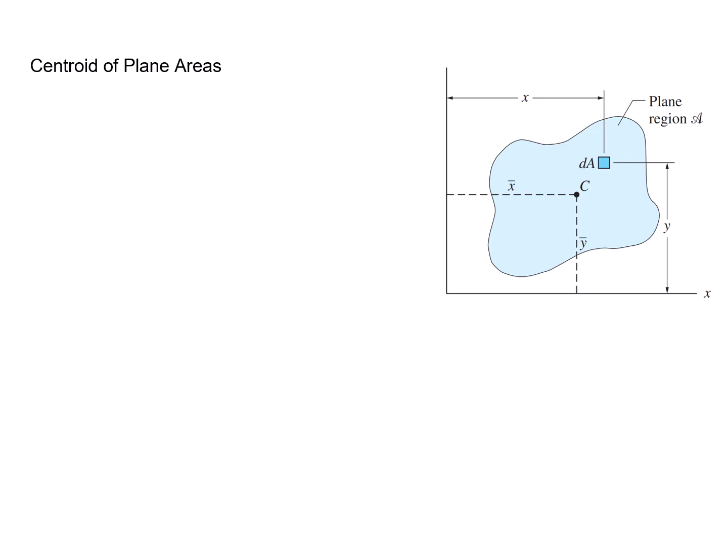So centroid of plane areas, we can see in the figure there's a plane area, let's call it cursive A. Then it has dA located at X and Y, and it has a centroid located at X bar, Y bar. So the cursive A is the plane region, and dA is the differential area element of cursive A. Let's just call it cursive A.

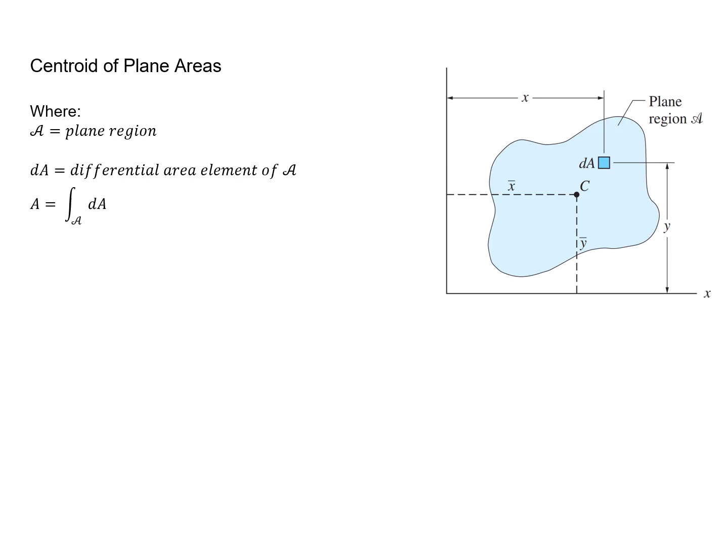And to get the area, we must integrate dA. So the first moment of area, or Q, this serves as a measure of how an area is distributed relative to an axis. It tells you where the area is located relative to the axis. So one purpose of this Q, or the first moment of area, is to locate the centroid.

So QX - centroid is the geometric center of the region. The centroid and center of mass coincide only when the distribution of mass is uniform or if the body is homogeneous. So Q sub X, or the first moment of area relative to the x-axis, is equal to the integral of y dA, while Qy is equal to the integral of x dA.

We must note that the unit for Q is cubic length - cubic meter, cubic inch, or cubic feet. Then to get the x and y coordinate of the centroid, we must divide Qy over A for the x coordinate and Qx over A for the y coordinate. So knowing this relationship, we can form this formula.

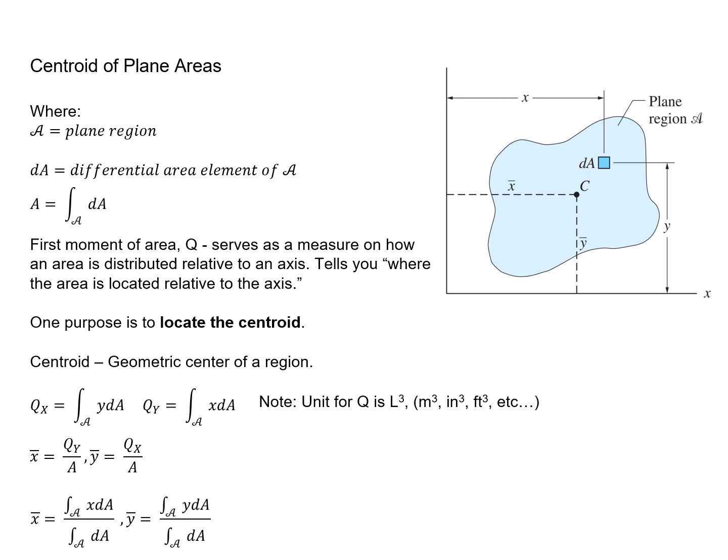X bar is equal to the integral of x dA all over the integral of dA. Y bar is equal to the integral of y dA all over the integral of dA.

So for the curves, the cursive L is the plane curve and ds is the differential length of plane curve L. To get the total length of the curve, we must integrate ds. So same relationship as before, just replace area with s, or length of curve.

Qx is equal to the integral of y ds, while Qy is equal to the integral of x ds. So the x component of the centroid is equal to Qy over L, while the y component of the centroid is equal to Qx over L.

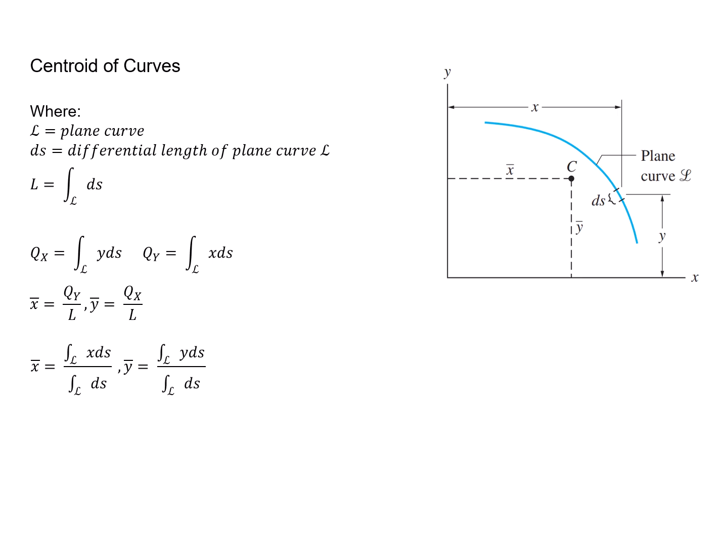So we can form this formula: X bar is equal to the integral of x ds all over the integral of ds. Y bar is the integral of y ds all over the integral of ds. Same as before, Q is cubic length - meter cube, inches cube, or feet cube.

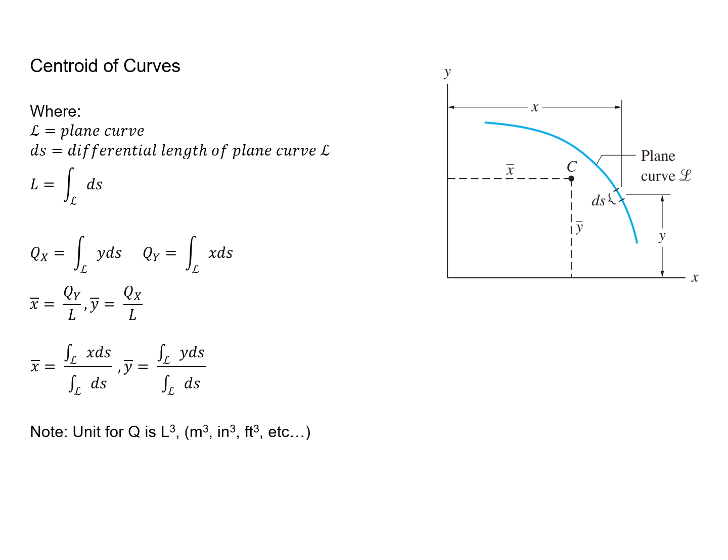So there are different integration techniques, just memorize them. For figures A and B, it involves double integration, while figures C to E involve the usual integration method that you've already learned in integral calculus. I'm assuming you've already taken statics, so you already know how to integrate, right? I'll show you a sample problem using double integration later on.

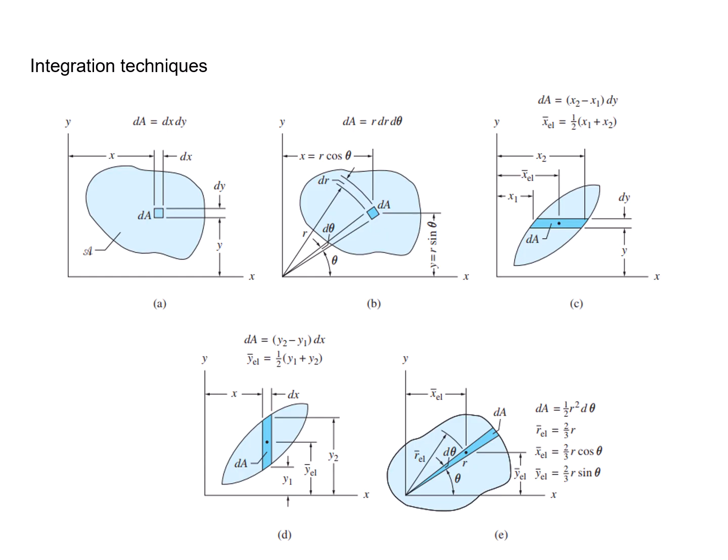basically it's still Qy all over A for the x bar and Qx all over A for the y bar. The difference is you can use the summation of area times their respective x coordinates divided by the summation of area for the x bar. And for the y bar, the summation of area times their respective y bars divided by the summation of areas.

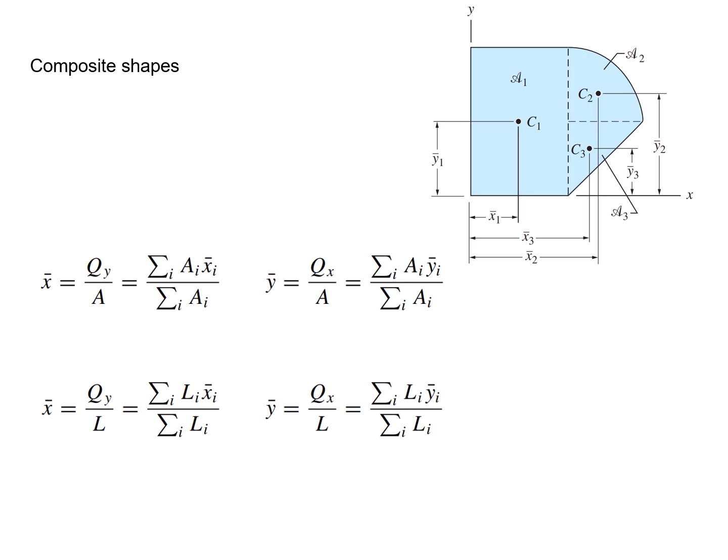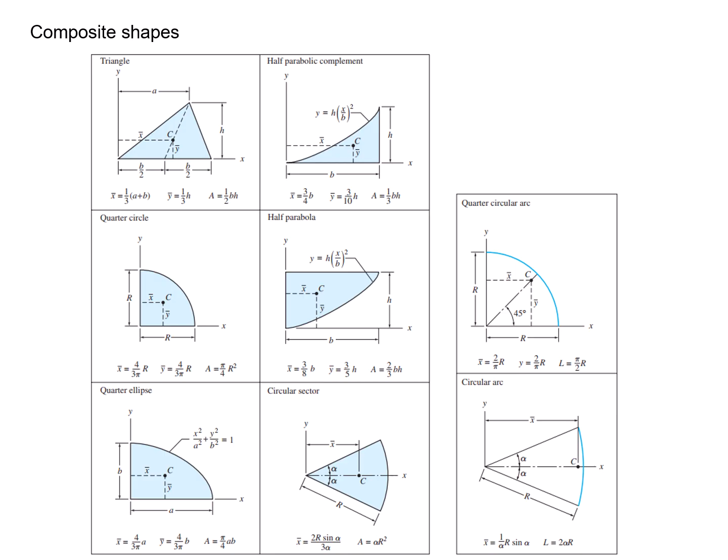So, problem 1. Determine the coordinates of the centroid of the area that lies between the straight line and the parabola. The straight line formula is x equals 2/3 y, while the parabola is x squared equals 40y. First, let's use the double integration method.

Let's get the area. I transformed their equations to be with respect to x. First, let's get the area. dA is equal to dx dy or dy dx. A is equal to the integral of dA. So let's start with dy dx.

dy is equal to y sub 2 minus y sub 1, y upper minus y lower. Y upper is 3x over 2. Y lower is x squared over 40. So that's the first integral: integral of dy, 3x over 2 minus x squared over 40. Then we integrate again via dx, from 0 to 60.

You already know how to get that, right? 3x over 2 minus x squared over 40 using integral calculus manual computations. Then we input that into our calculator. We get the area is equal to 900 mm squared.

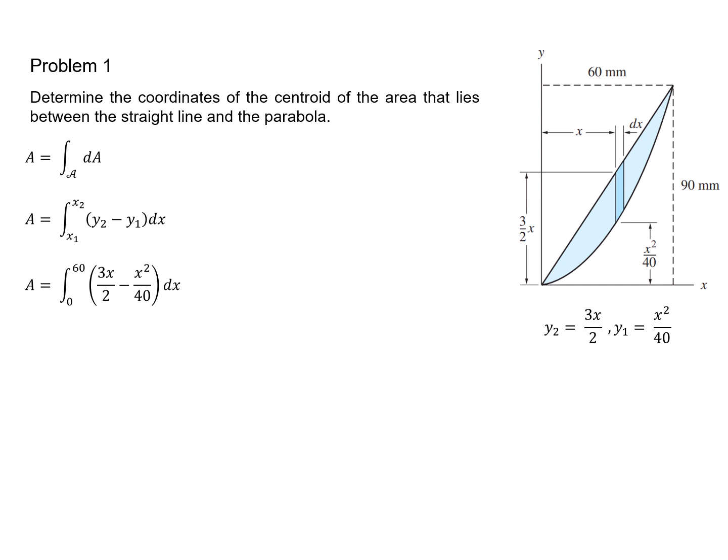Same problem, but this time using a vertical differential area element. Area is x sub 2, x sub 1 that we will use, times y sub 2 minus y sub 1. Y sub 2 is equal to 3x over 2, while y sub 1 is equal to x squared over 40. So area is equal to 900 millimeters squared.

While Qy is equal to the integral of x dA, sorry. So replace x dA with 3x over 2 minus x squared over 40. The upper and lower limits are 60 and 0 respectively. We can obtain Qy is equal to 27,000 cubic millimeters.

For dQx, earlier we used XEL, right? Now, YEL, which is the center, the point in between the upper and lower values of y, in between y2 and y1 at any given point. So YEL is equal to 1/2 of 3x over 2 plus x squared over 40.

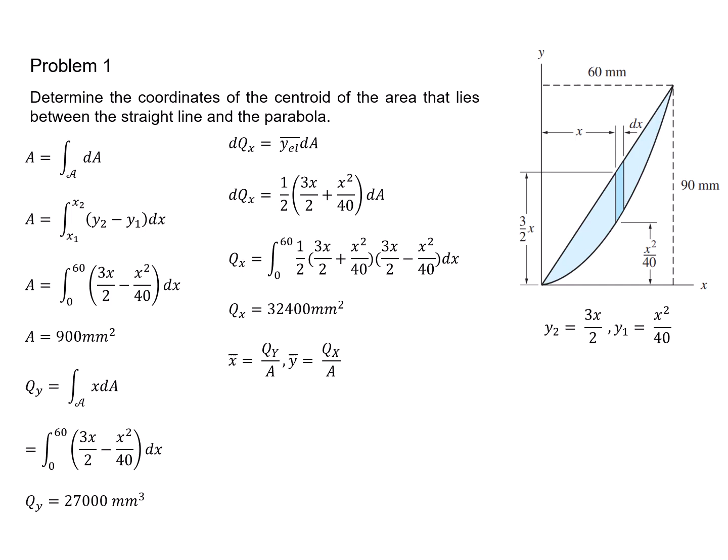We can use integral calculus and input it into the calculator, same as what we did earlier. So Qx is equal to 32,400 square millimeters. Then x bar is equal to Qy over A, y bar is equal to Qx over A. We obtain the same values as before: x bar is 30 mm and y bar is 36 millimeters.

Problem 2: find the coordinates of the centroid. This one won't involve integral calculus. This will only involve the summation of area times the coordinate, all over the summation of area.

Let's get the area of the rectangle as a whole. We have area is equal to base times height, which is 400 plus 200 plus 200, or 800 for the base, and 700 for the height. We have an area of 560,000 square millimeters.

Ang x bar ng rectangle is 0 kasi it lies on the center. Ang y bar or y coordinate ng centroid is equal to 1/2 its height, so 350 millimeters.

For the semicircle naman, napansin nyo may minus kasi deductive siya, diba? Area niya is 1/2 pi r squared. So 1/2 pi 300 squared. Area is equal to negative 45,000 pi.

So yung centroid niya, kanina nasa slide kung paano makuha yung mga centroid and areas of different common shapes. Centroid ng circle, CX, centroid ng semicircle is 4r over 3 pi. So 4 times 300 all over 3 pi. Centroid niya is 127.324 from its center.

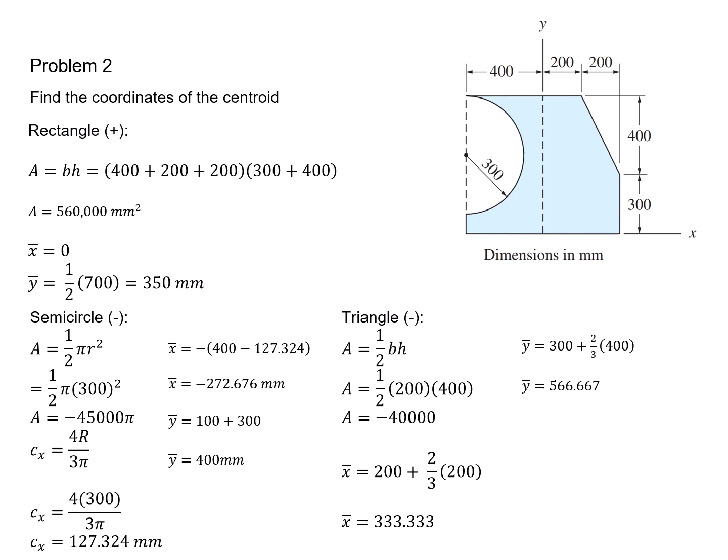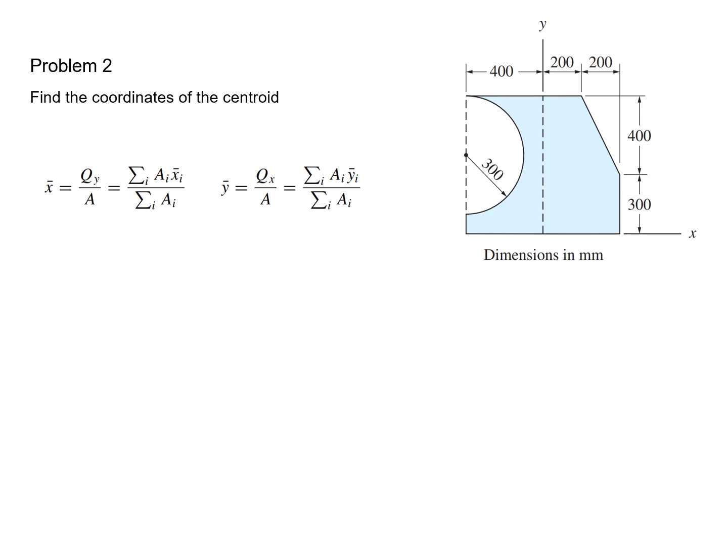So i-tabulate natin. Gamitin natin ang concept na x bar is equal to the summation of Ax bar all over the total area, and y bar is the summation of the respective area and their respective y bar divided by the total area. Gawa tayo ng Excel, ng table.

Nag-summation na tayo ng area. We have a total area of 378,628.331, and the sum of the Ax values is equal to 25,215,327.995, while the summation of the Ay bar, or first moment of area, is 116,784,665.569. So X bar is...

25,215,327.995 divided by the total area. X bar is equal to 66.597 millimeters, while Y bar is equal to 116,784,665.569 divided by the total area. We have Y bar is equal to 308.441 millimeters. So yan.

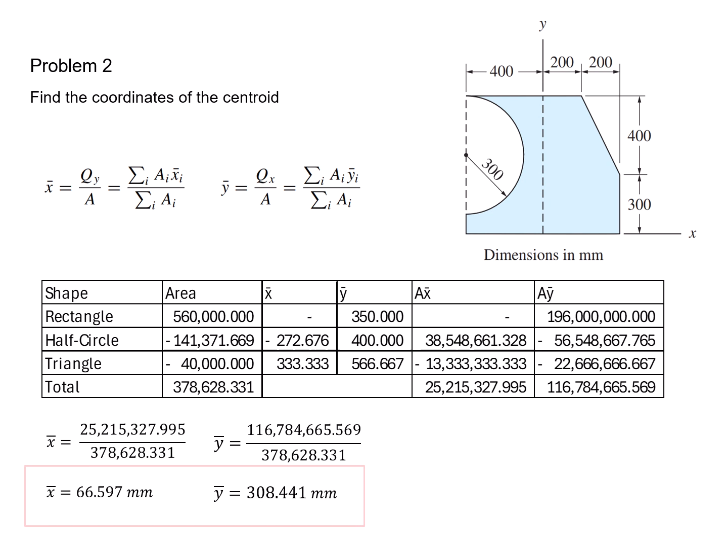So problem number 3, find the coordinates of the centroid. Similar to the previous problem, pero ito, ano siya? Curve instead of area, length.

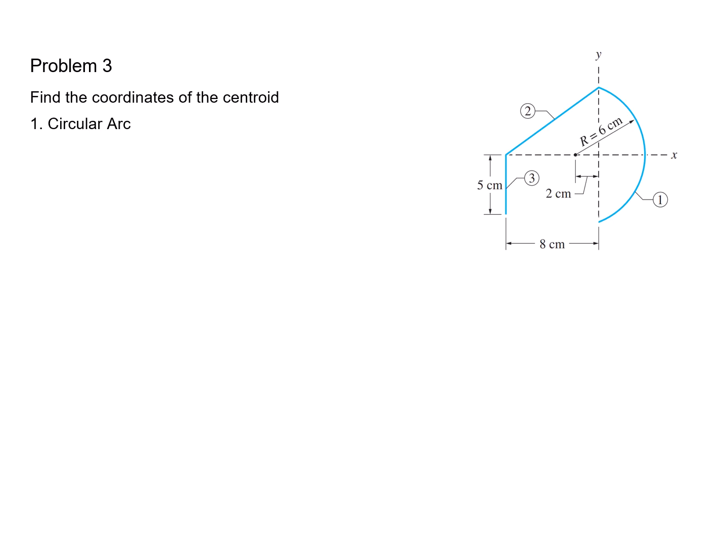So for the circular arc, recall in your geometry, the arc length is equal to the radius times the angle in radian. So para makuha natin yung angle, kunin muna natin si alpha. Alpha is the inverse cosine of 2 over 6. Kasi cosine is equal to adjacent over hypotenuse. So alpha is cosine negative 1 of 2 over 6 is equal to 1.231 radians.

So recall nga natin, the arc length is equal to the radius times the angle in radian form. Angle theta is equal to 2 alpha. Theta is equal to 2 times 1.231. Theta is equal to 2.462. So the arc length is 6 times 2.462 radians. The arc length is 14.772 centimeters.

Tapos recall natin sa previous slides yung figure para makuha yung centroid, yung formulas ng centroid and areas of different shapes and curves. Ito, according dito, ang x component ng centroid niya is equal to 1 over half of the internal angle times radius times sine of the internal angle, sine ng half of the internal angle, or alpha.

So y bar is 0, obvious. X bar is equal to 1 all over 1.231 times the radius 6 times sine of 1.231 radian. X bar is equal to 4.595 centimeters.

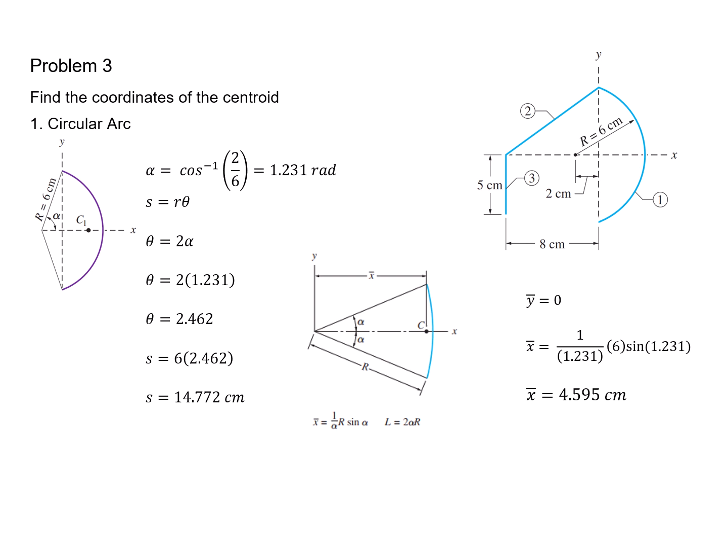Hindi ko nasulat. Laser pointer. Unahin natin yung diagonal line. Kunin natin ang height niya. Height is equal to 6 sine 1.231. Height is equal to 5.657 centimeters. Yung 1.231 na-obtain natin sa part na kinuha natin ang arc length. So height is equal to 8 centimeters.

Base, it should be base. Base is equal to 8 centimeters. So Pythagorean theorem, the length of the diagonal line is equal to the square root of 5.657 squared plus 8 squared. L is equal to 9.798 centimeters.

Yung x bar niya is half ng length niya, so negative 8 divided by 2, so negative 4. While yung y bar naman niya is half ng height, 5.657 divided by 2, y bar is equal to 2.829. For the vertical line, obvious, given na length is 5 centimeters, while the x bar is negative 8 from 0, from the center line, while y bar is half of its vertical length, negative 2.5 centimeters.

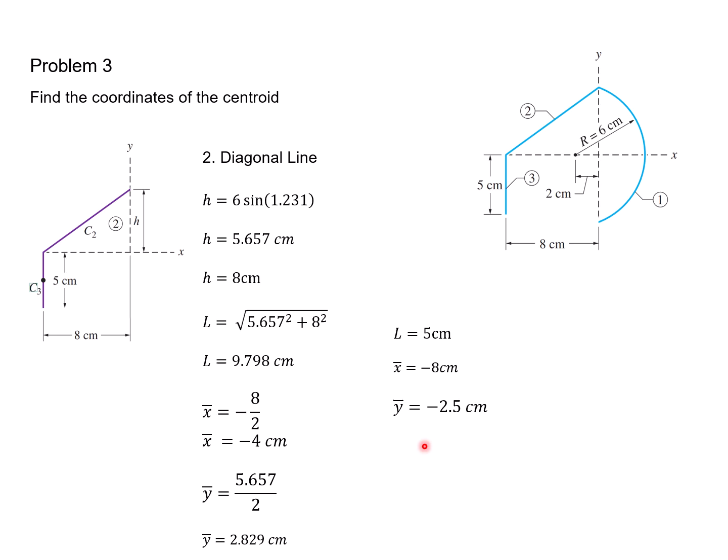So ayan, i-tabulate na natin. The sector and the diagonal line and the vertical line, we have a total length of 29.570 centimeters, while the first moment of the curve, the summation nila is negative 40.859 and 15.219 for the first moment of curve along y and along x respectively.

So x bar is equal to negative 40.859 all over 29.570. We have x bar is equal to negative 1.382 centimeters. Y bar naman is 15.219 divided by 29.570. We have y bar is equal to 0.515 centimeters. So final answer, that is all.